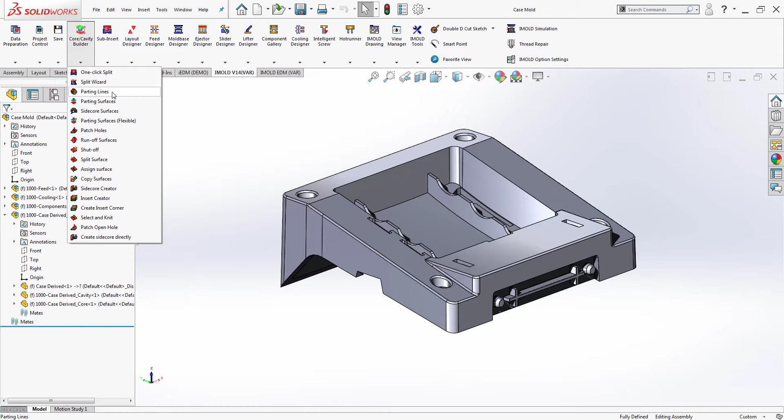Access the CCB functions by opening an iMold project. On the IMOLD Command Manager toolbar, click Core Cavity Builder, then select Parting Line from the menu. The Parting Lines Property Manager is displayed. Under Operations, click Auto Search.

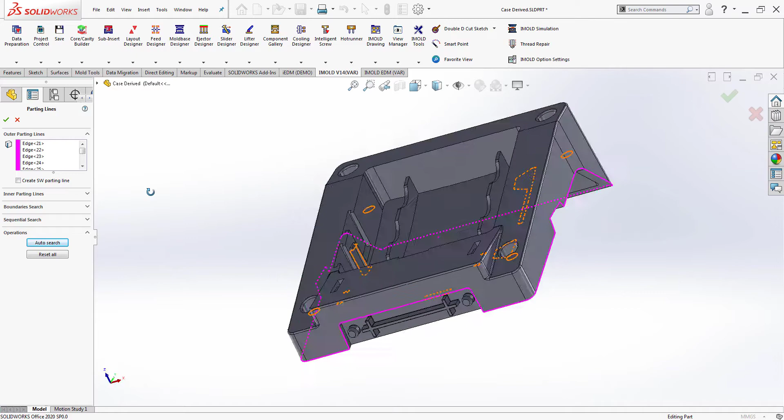Analyze the inner and outer parting lines highlighted by different colors. Activate the Inner or Outer Parting Lines menu to edit if the parting lines are not as desired. Click OK to accept the search result and close the Parting Lines Property Manager.

We can access information about the part in the CCB Manager pane. The holes on the plastic product need to be covered in order to split the insert blocks. In other words, the faces of the mold must slide past each other until the mold closes, where they create a seal which creates a hole in your part. Use Core Cavity Builder's Patch Hole utility to patch them.

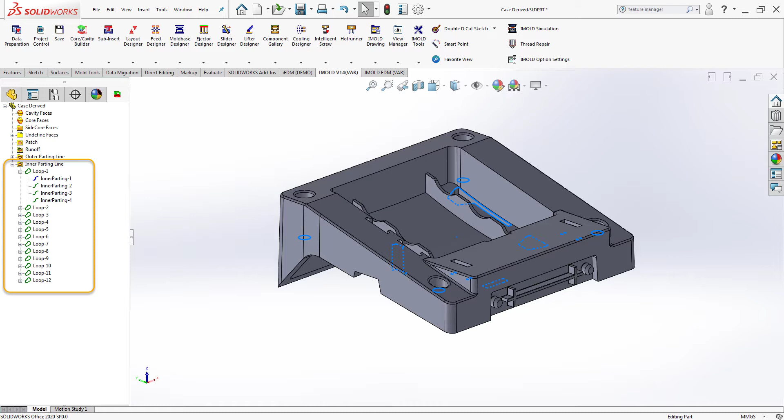Before that, we have to identify the core cavity faces. On the IMOLD Command Manager toolbar, select Core Cavity Builder, Parting Surfaces. Under Operations, check Simple Search and click Search. Simple Search is used when parting lines are fully defined. The definition of parting lines assists in the parting surface search. The cavity and core faces are highlighted in different colors.

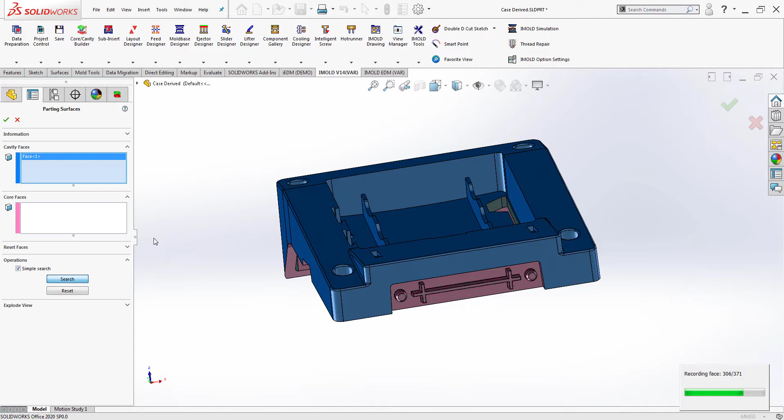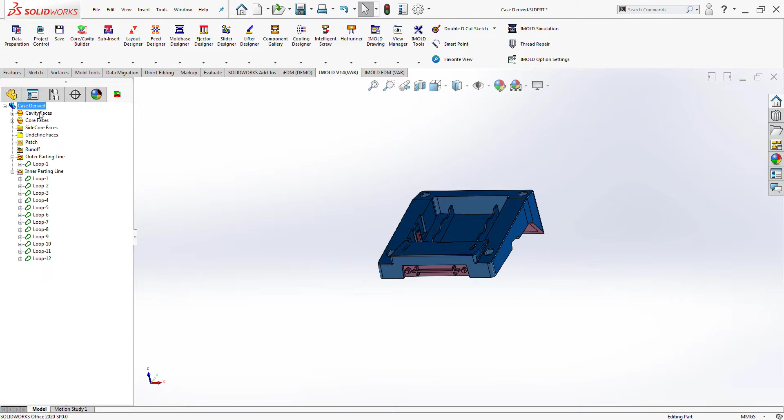Expand the Explode View menu to show the exploded view. Click OK to accept the parting surface result. You can further toggle the View menu by using the right mouse button in the CCB Manager pane.

Now, on the IMOLD Command Manager toolbar, select Core Cavity Builder and select Patch Holes. The Patch Holes Property Manager is displayed. Under Methods, select the Auto Patch option. Click OK to automatically patch all the holes and close the Property Manager.

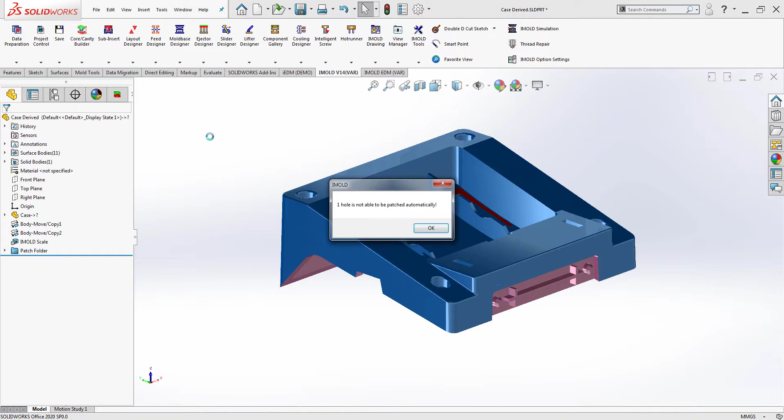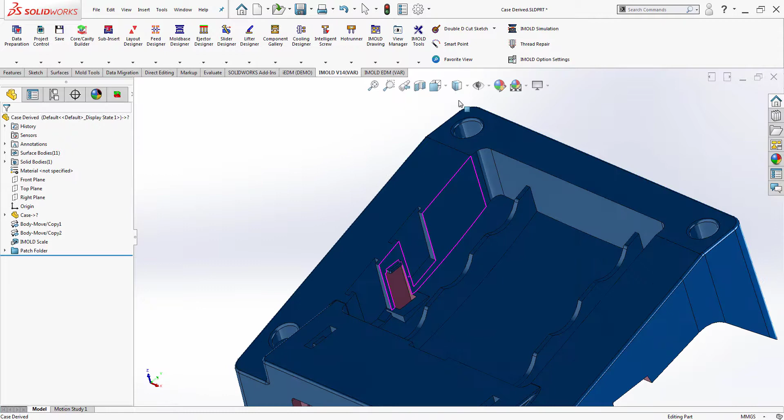If a complex surface is needed, you can use these other tools to complete the task. In this case, the auto function could not patch the telescopic hole. Therefore, we can use a shutoff surface option to patch the hole.

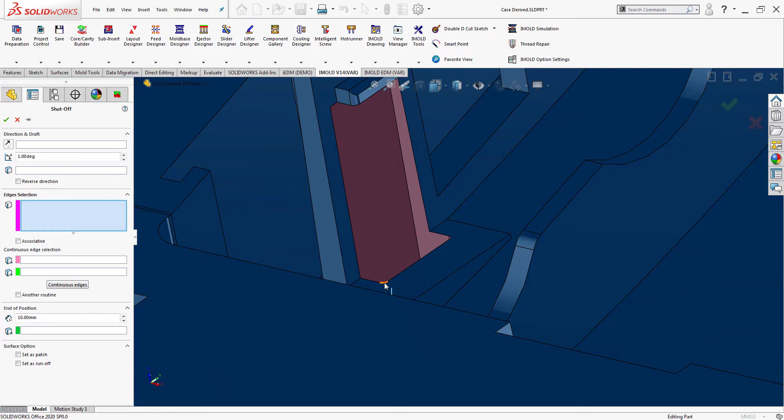On the iMold toolbar, select Core Cavity Builder and select Utilities Shutoff. The Shutoff Property Manager is displayed. Under Direction and Draft, change the draft angle to 1 degree. Click on the Edges selection box to activate it. On the graphics area, select the 3 edges shown. A preview of the shutoff surfaces that will be created is displayed.

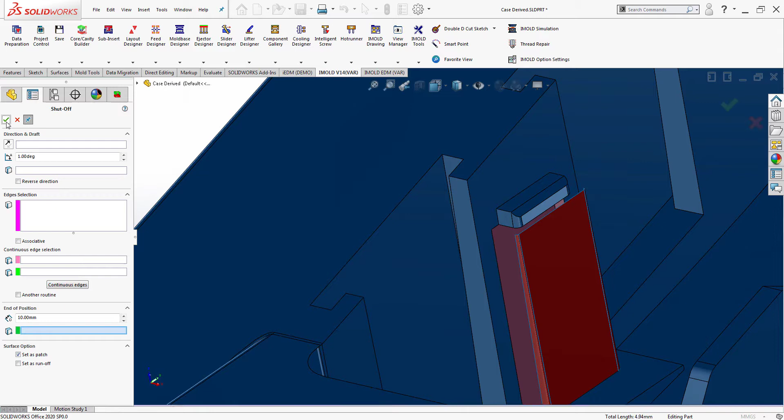Under End of Position, select the box to activate it and select the edge shown. You can see that the shutoff surface is extended until this end position. Under Surface option, select Set as Patch. Click the push pin to keep the Property Manager active, and click OK to accept and create the shutoff surfaces.

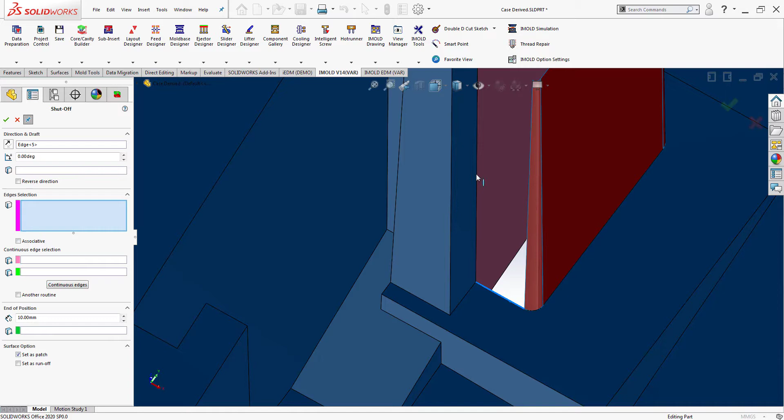Next, under Direction and Draft, select the edge shown for the direction, and set the draft angle to 0 degrees. Click the Edges selection box to activate it and select the edges shown. Under End of Position, select the box to activate it and select the edge shown. Click OK to create the surfaces, then click X to close the Property Manager.

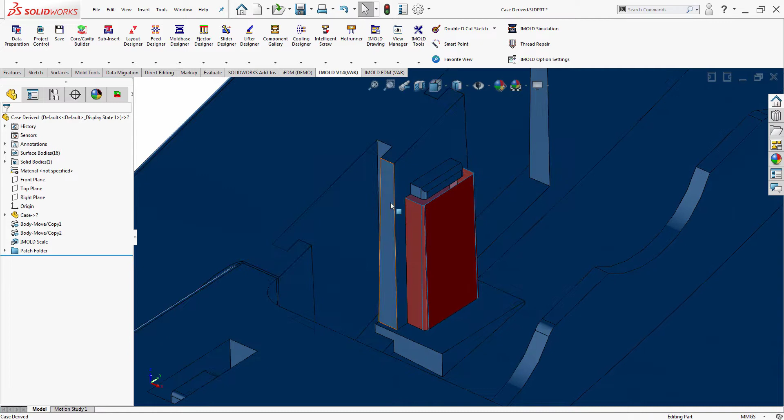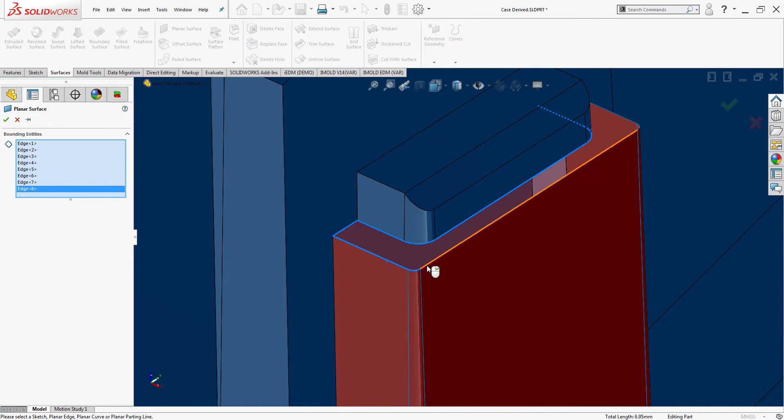We can also leverage surface tools from SOLIDWORKS to complement our task. From the SOLIDWORKS menu, select Insert, Surface Planar. The Planar Surface Property Manager is displayed. Select the bounding edges shown. Click OK to create the surface.

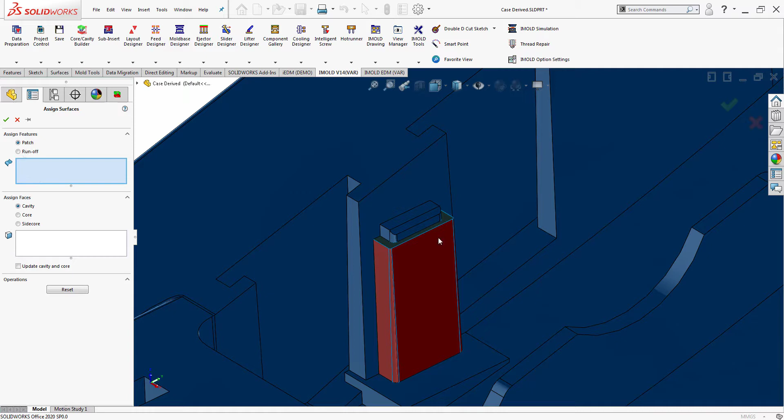Because the surface was created using SOLIDWORKS, we need to assign the surface so that iMold recognizes it. On the iMold toolbar, select Core Cavity Builder and select Assign Surface. Under Assign Features, select the Patch option, then select the surface created in the previous step. Click OK to assign the surface as a patch and close the Property Manager. The color of the surface will change, indicating that the assignment is successful.

The edges of the part have to be extended larger than the inserts themselves in order to successfully use them to cut or split the inserts. The surfaces created by extending these edges are called runoffs.

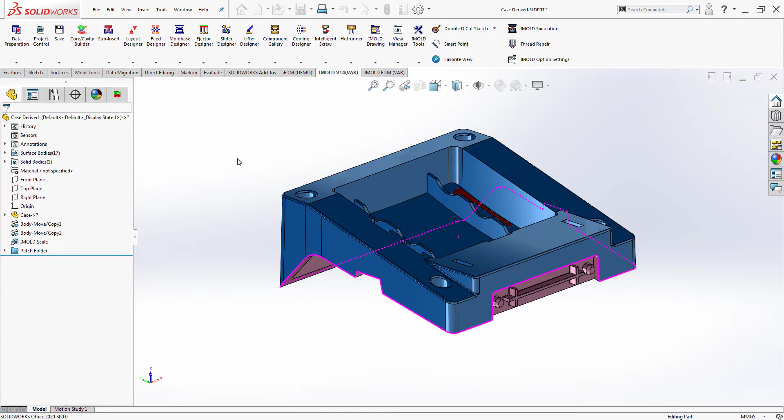The runoff surface is created. Let's create insert boxes. On the IMOLD Command Manager toolbar, select Core Cavity Builder and select Insert Creator. The Insert Creator Property Manager is displayed, and a preview of the insert is displayed in the graphics area.

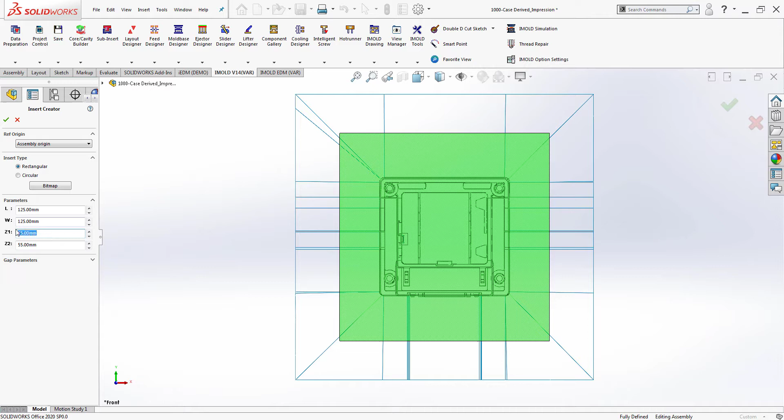Under Ref Origin, select the Assembly Origin option. Under Insert Type, select the Rectangular option. Under Parameters, change the value: L is 125 mm, W is 125 mm, Z1 is 36 mm and Z2 is 55 mm. Expand the gap parameters group and check X balanced and Y balanced. The preview updates as the values are changed. Click OK to create the inserts and close the Property Manager.

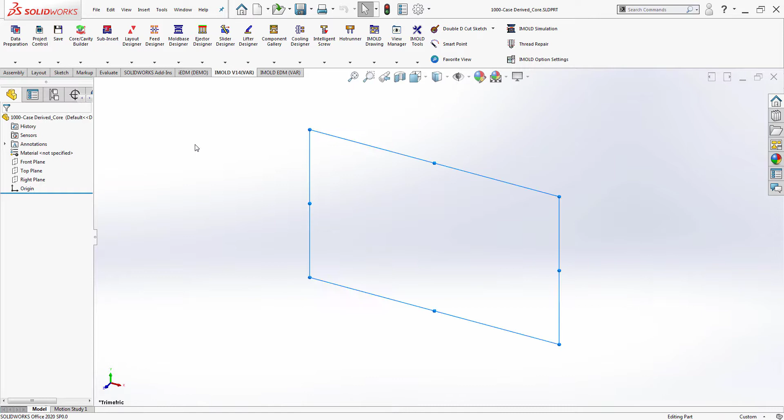Let's toggle back to the top assembly view in SOLIDWORKS. To obtain the insert profiles, the surfaces have to be copied to the correct inserts and the solid blocks trimmed using the surfaces. Both these steps can be accomplished almost auto-magically using the Copy Surfaces function.

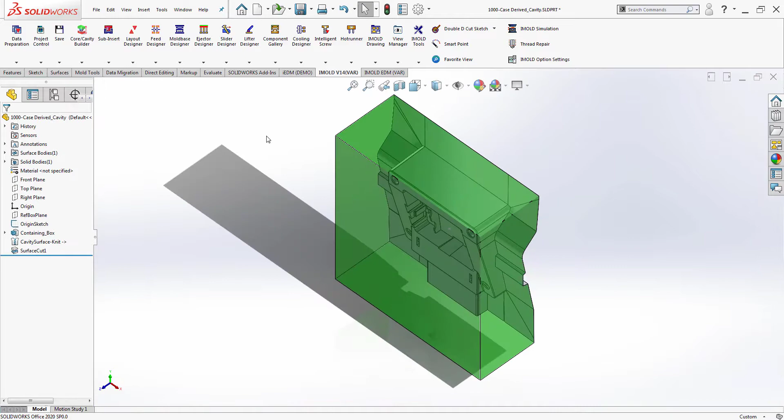The Copy Surfaces Property Manager is displayed. Under Destination, select the Cavity option, and click OK to copy the tagged surfaces and trim the cavity insert. All the cavity faces, the patch and runoff surfaces are knit into one single surface and copied to the cavity insert. The cavity insert is also automatically trimmed using this surface.

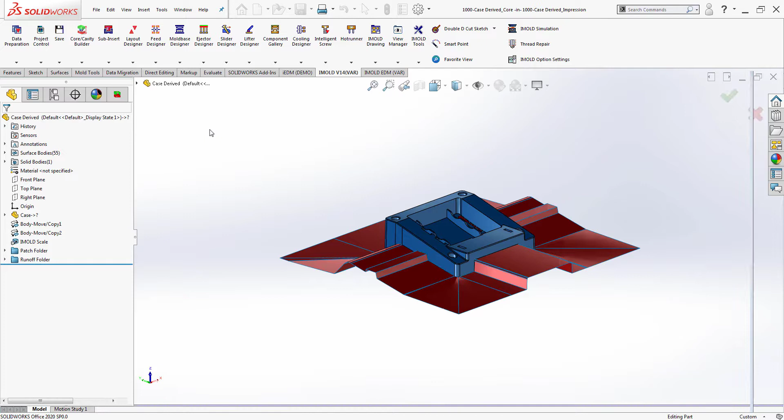Again, on the IMOLD Command Manager toolbar, select Core Cavity Builder and select Copy Surfaces. Under Destination, this time select the Core option. Click OK to knit all the tagged faces to the core part. When complete, save the project.